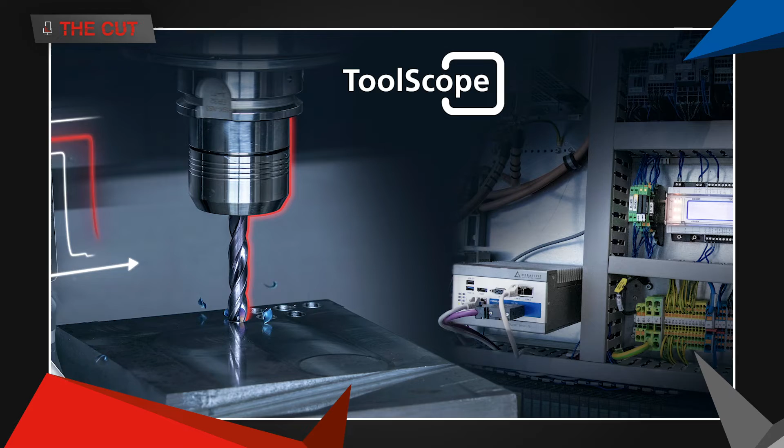So Eike, what is ToolScope and what does process monitoring mean really for machining? Yeah, well, so as you said before, the ToolScope is part of the digital solutions of the CERATIZIT group. And the ToolScope itself is more or less a small high-performance industrial PC, which is installed directly into the control cabinet of the machine. And on this industrial PC is running our firmware, the ToolScope firmware. And we have a direct communication with the machine control.

So this could be, for example, the Profibus or the Profinet connection, but also for Industry 4.0, it's very important to have a different connection to the machine control. And there we have also the possibility for the OPC UA or also the UMATI connection to the machine control. So in any case, the ToolScope monitors the process. In standard, it's the load of the spindle.

And if the process deviation is too high from the learned process, the ToolScope will stop the machine directly and avoid, in this case, further damage to the spindle, to the machine itself, but also to the workpiece and the tool. So it's a very smart solution, obviously. I mean, the ToolScope learns the typical parameters at which your machine is running, and based on deviations from that learned data and information, it can make adjustments on the fly.

I mean, that sounds really interesting. Martin, what does this mean, though, for machining in general? Yeah, maybe we do a short example here. If you're thinking about a forged component, we have the challenge that we have fluctuating stock offsets. So that's a significant influence on the milling process. So we have different workpiece qualities from the pre-machining that influence our process.

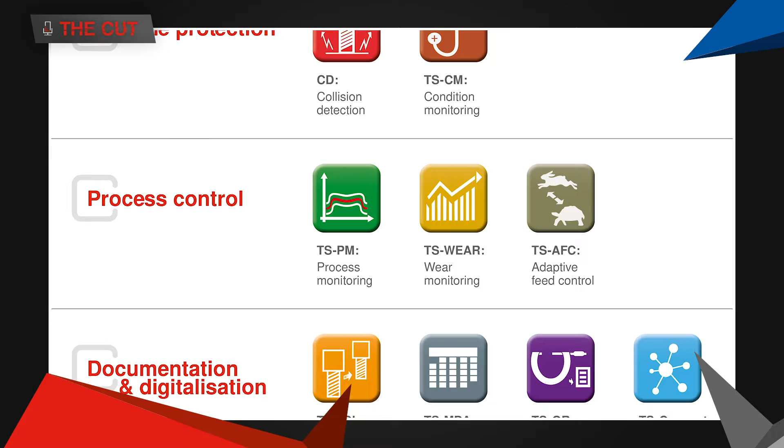So the solution here is that we have an active interaction into the process to react live to the process forces. And ToolScope solves this problem with the functions of the process monitoring, or for example, also the adaptive feed control to deal with these problems in manufacturing.

Cool. That sounds very, very interesting. I mean, who are the typical target groups? What are the types of processes and machines that ToolScope is really well suited for? Yeah, we can think here of medium and large series. If you take a number, we are talking about 1,000 identical parts per year on one machine. But we are not only speaking about identical parts, but also identical processes.

So the machine types we support are, for example, Grob, SW, Hermle, Chiron, Stama, Heller, and Schuster. And if we are going with Grob, DMG, or Chiron, we are the original equipment supplier. So that means that the customer can choose ToolScope when buying a machine at the machine tool builder.

Sometimes there are concerns that we have some issues with the warranty, but that's not so. With these just mentioned machine types, we have no problem with the warranty, and also with the PLC project. We need the PLC project to connect the ToolScope to the machine and to the control. So also with these mentioned machine types, you have no problem with the PLC project.

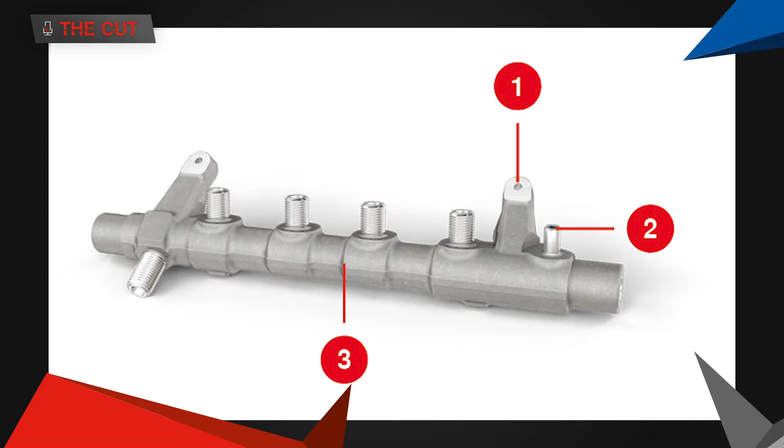Yes, of course. So maybe we can go into an example from the automotive sector, for example the production of a common rail. As you know, there is strong competition in the automotive industry, and it's mass series production, and the target there is always to increase productivity.

We had a look at different machines where this rail is produced, and with our adaptive feed control, for example, we reduced the cycle time more or less by 15%. This was a big benefit for the customer because they can produce more parts during the shift.

Another point here is, for example, the wear optimization of the tool. Through the knowledge of our application engineers, who we are upskilling to digital application engineers, we combine the knowledge of the classic tooling application engineer with the digital processes of ToolScope. This unique knowledge we can use for tool life optimization for the customer.

So we save the customer tooling costs by more or less 30%. Another point was process safety, and this improves up to 25%. This was a big benefit for the customer.

That's great. It's always nice to hear real use case examples to reinforce the things we talk about, in particular the advantages of ToolScope in general. Marty, what really are the advantages of utilizing a process monitoring system like ToolScope?

With the ToolScope system, we are able to select the correct settings for any process for any customer. Our system can monitor a wide range of processes, also because of the wide range of settings we have. But if we're talking about process monitoring, we can do more, because we're also talking about the evaluation and visualization of the data.

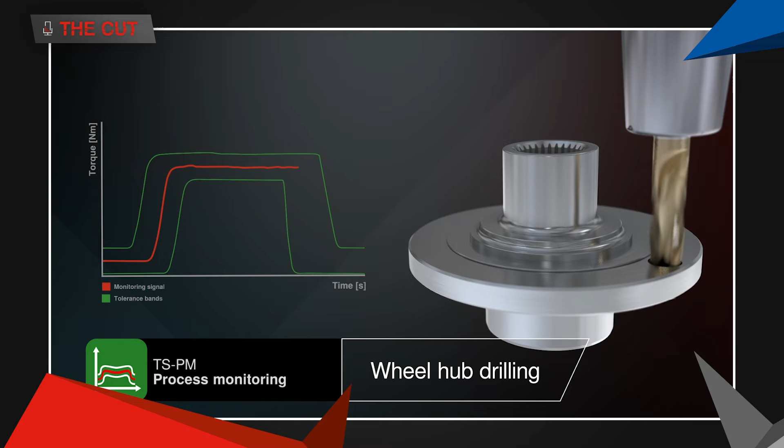As long as the signal is between the tolerance bands, we are dealing with a very good process. And if a limit is violated, in case of a tool breakage or something like this, ToolScope reacts in real time with a direct machine response. So in the drilling process, that would be a direct stop in the feed and the spindle stop delayed a few seconds to allow the tool to cut free. Afterwards, the spindle stops and the process is safe.

If we talk about the next function, the wear monitoring, here we see, like in the process monitoring, the average torque. It's plotted here, but per process. And on the other side, we see the number of holes.

To set up the wear monitoring, we need also a yellow line, and it's called the wear limit. A few words about the wear limit: this is automatically determined by the system, but it's an empirical value. So we have to check out this value to make it perfect for this process.

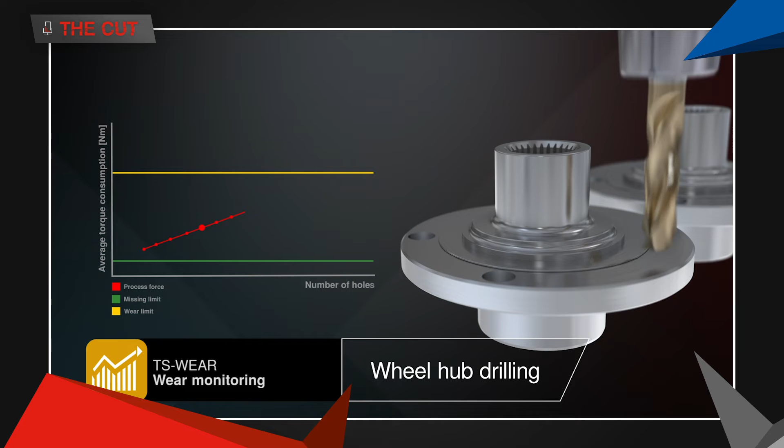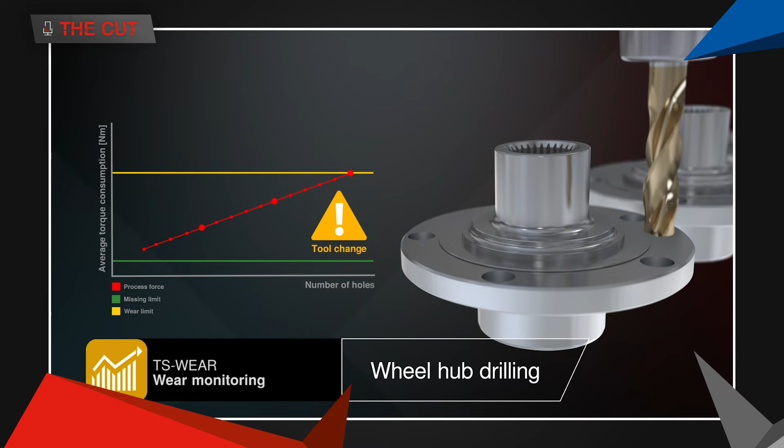The red dots right here are the average torque. So if we are machining this process right here, the wear is going to increase, so with increasing wear, the forces are also going up. Sometimes the red line is going to touch the yellow line, and if this is happening, ToolScope sends also an alarm to the machine and makes a direct machine stop. So here we are able to monitor the wear of the tool.

I mean, that's incredible, the ability to... the potential savings are enormous. Before you destroy your machine or destroy your tool, the ability to have the machine stop and take a look and analyze what's going on and what's occurring. I guess those tolerances, once they're dialed in, can make a series production almost fully automated. And that's a huge advantage to production lines.

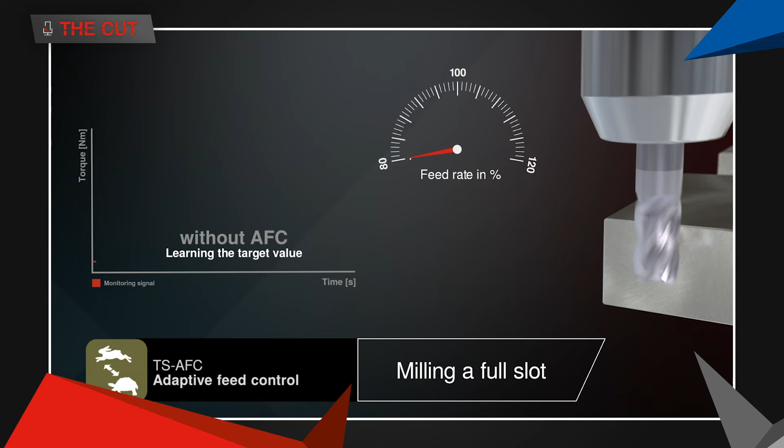What are some of the other features or functions that we wanted to discuss? Yeah, for example, the adaptive feed control, as I said before, with the rail example. Here in this example, we see on the left side the time-torque diagram, and in the center, the tachometer showing the feed rate between 80 and 120%.

So the teaching of the control variable is, for example, the optimal load of the tool, and this takes place under more or less 100% of the feed rate. This is shown here as an example during the machining of a full groove.

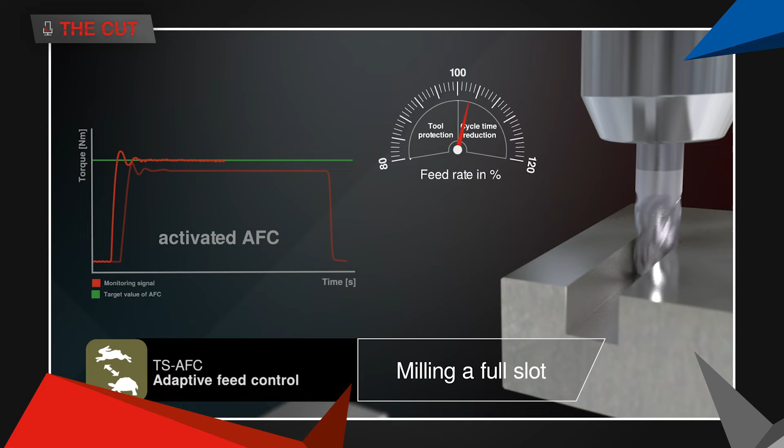Afterwards, we see the same machining again, but now the adaptive feed control is activated, because it's obvious that the green control variable has been set. So this is our limit, which means as long as the limit is not reached, ToolScope will control up to 100% in the material, which fluctuates between 100 and 105%.

When we are leaving the material, the control goes back up to 120% in order to save further cycle time. So if we are not in the material, we can drive faster. The result is a more or less moderate cycle time reduction, around 5 to 10%.

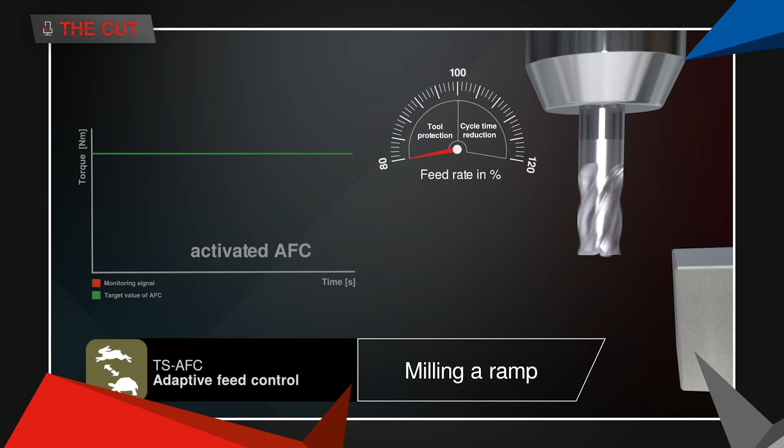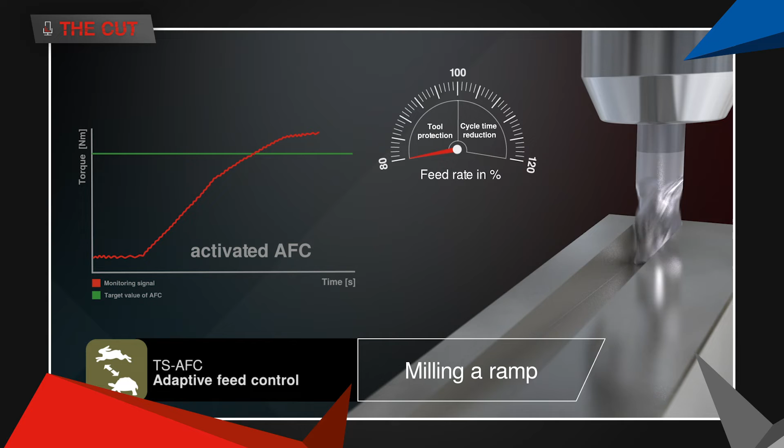It becomes more interesting when there are fluctuating machining parameters. Here's a demonstration machining a ramp from 0xD to 2xD. At the entry, the control is already slightly below 120%. As the cutting depth increases, the control variable is soon reached. To avoid overload, ToolScope starts to control below 100% to protect the tool and the machine.

So in summary, we achieve an optimal balance between tool protection and cycle time reduction, about 5% in this example. The cycle time reduction depends on the machine and the process as well. As a standard, we say it's between 5 to 15%.

Those numbers are great. When you're talking about a large series production, increasing tool life and reducing cycle times leads to enormous potential time and cost savings, and just better optimized processes. So yeah, that's really, really great.

Let's talk a little bit more about protecting the machine itself. I know one of the functions is collision control. The collision detection, for example, is normally used at a customer who has only a small lot of series, or...

...single lot production, for example. So if they use different programs, different pallets, different workpieces, and maybe the operator chooses not the correct pallet, the machine could experience a collision and suffer further damage.

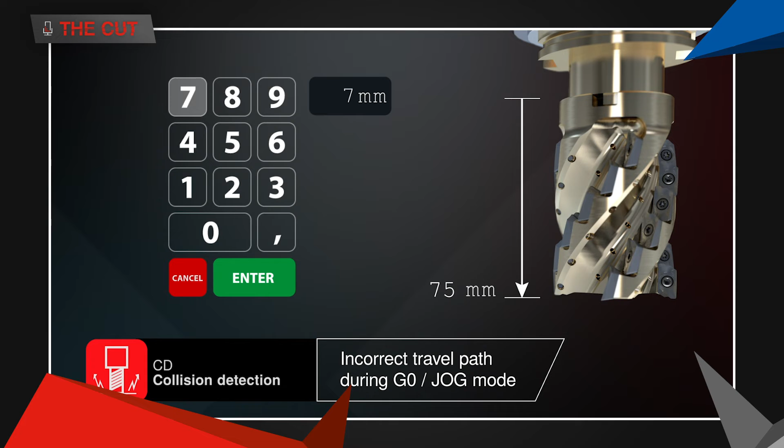Another option could be the tool length compensation, which is maybe not transmitted correctly to the control. So here we have an example: the measured tool length is 75 millimeters, but the operator just enters 7.5 millimeters. That means the tool is practically 67.5 millimeters too long.

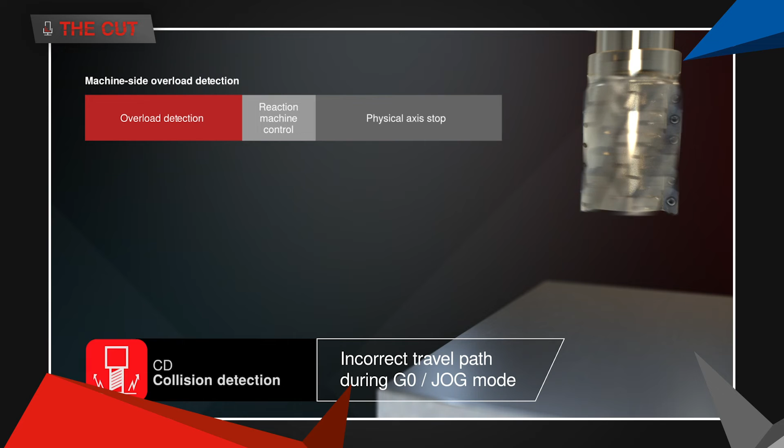We will first demonstrate the effects of this collision with a standard machine overload detection. That means it takes a few hundred milliseconds for the machine to detect this overload and stop the axis. Normally the feed axis tries to push the axis to the target position, and this means the spindle is damaged, the axis is damaged, or other parts of the machine.

The tool, and the component too, gets damaged, right? Yeah, of course. Our collision detection works by installing an acceleration sensor close to the fixed bearing of the machine control, or of the spindle, so that we are close to the tool and see the vibration directly on the tool.

So if we see such a collision, we react in under 1 millisecond. This is the big benefit, a really fast reaction, and we choose directly an emergency stop for the machine. It stops, and it's more or less like an airbag for the machine control.

The combination of all these types of functions from the ToolScope system allows for an incredibly flexible and agile system. It can really be custom adapted to support a number of different types of processes. That's a great advantage of the system, I think. With different functionalities, you're able to pick and choose what best suits your own particular production or manufacturing process needs.

How about documentation? How is the data collected, and what are some of the documentation and digitalization tools utilized to represent this data that's being collected?

In addition to documentation, digitalization is also an important part. Especially because of the current pandemic situation, remote support becomes more and more important. Because of travel regulations, it's not easy to enter the customer's plant. So if the customer has a problem with the ToolScope or with the process itself, we now have the possibility to log into the ToolScope from all over the world, out of the office, and give our customers the support they need.

In the best way, for example, it's also possible if we have some problems with tooling, we can use the experts for the tooling or the digital application engineer, which I've talked about before. It's really important and a big benefit for our customers and also for us to give them the service they need for the moment, so that their production runs in the best way.